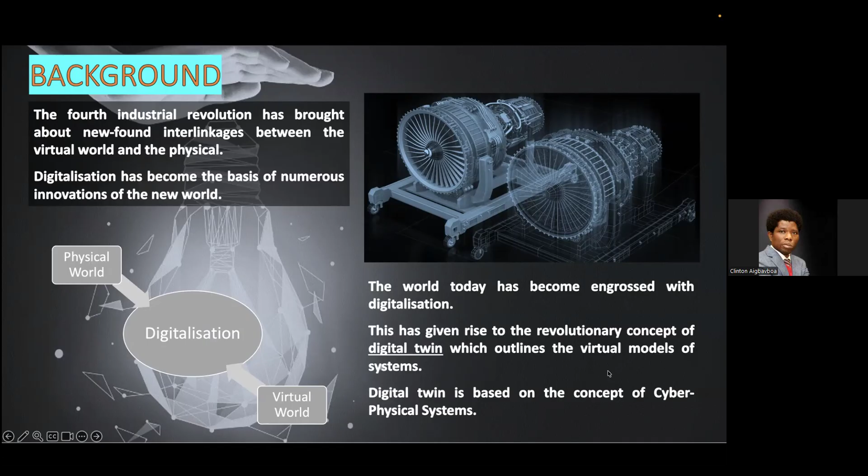I think one of the things we must pay attention to when it comes to the fourth industrial revolution is that it's really helping the global south to leapfrog and manage its built environment. Digitalization underpins a whole lot of global innovations, helping us drive new methods of design, operation, and problem solving across every industry. The concept of digital twin has emerged as a powerful tool, providing a virtual representation of physical systems for enhanced monitoring, analysis, and optimization of the space we're working in.

As we all know, the digital twin is more or less a digital replica or representation of a physical system or asset, enabling us to manage, monitor, and analyze, and also to optimize systems either remotely, or to test scenarios and predict future performance. This is one of the things we thought about when conceptualizing the experiment I'm going to present shortly.

I think the whole concept of digital twin ensures that I see it as a very dynamic digital representation of a physical object. Considering some of the things we're doing at the moment within my research center, we're actually creating digital replicas of bridges, because we've had issues with failed bridges, and we're working with the local municipality here to carry out condition maintenance and real-time predictive assessments of infrastructure. We're looking at water dams, reservoirs, and also bridges across Johannesburg. It's one of the things we're working on for the new year.

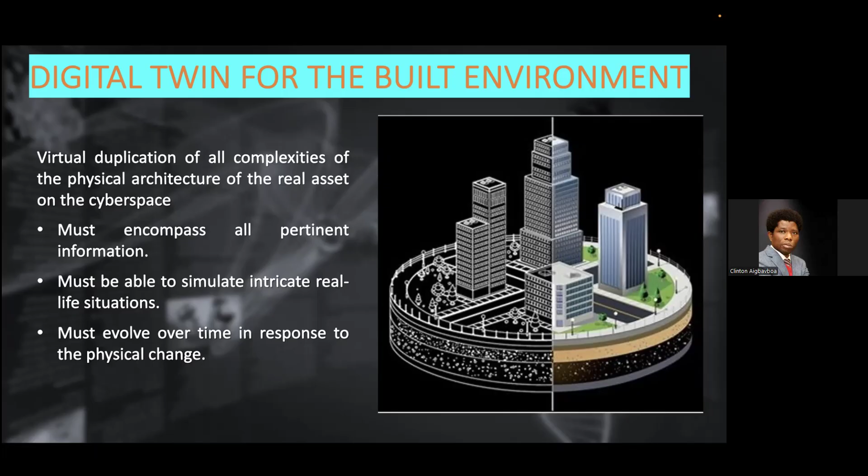Looking at the digital twin for the built environment, I think one of the things we need to look at is that the DT functions by continually drawing data from a particular physical system, through the creation of an accurate virtual counterpart. If that is not there, we will not be able to monitor or harness the data from those systems. So the whole model of DT depends on real-time information about the conditions, the boundaries, the behavior, and specific parameters which must be in place, along with the system dynamics that enable us to create a precise and responsive digital representation of that object.

In terms of our research motivation, one of the things I had in mind was the whole emergence of BIM. The application of digital twin technology within the built environment is still new within the global south, and mostly in South Africa. But from experience and looking at work from other geographical contexts, you realize that apart from providing a virtual duplication of the physical asset, we also have the opportunity of creating accuracy and usefulness to measure how this infrastructure actually performs. So one of the things we had in mind was to model the intelligence of a particular space to see how it performs and how it's actually functioning.

In terms of the digital twin for IEQ, that's indoor environmental quality, this for me represents a very valuable approach, bringing DT into it to optimize and enhance the health, comfort, and well-being of occupants in the built space, because we spend more time indoors compared to outdoors. IEQ encompasses various factors like indoor air quality, temperature, humidity, lighting, and acoustic properties. We believe that by creating a dynamic digital replica of the space, DT will help us simulate, analyze, and monitor the performance of various systems such as heating, ventilation, HVAC, and the acoustic properties of that particular space.

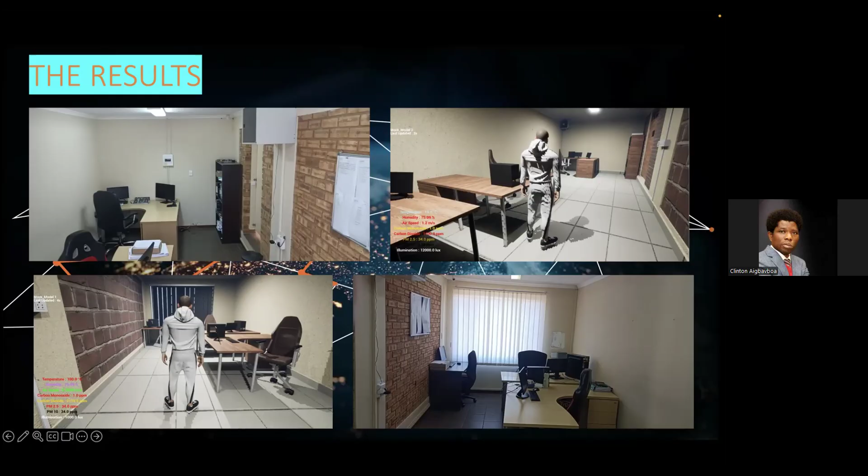Real-time environmental data were captured, including temperature, humidity, air speed, carbon monoxide levels, and particulate matter. All of this was integrated directly into the virtual environment, enabling dynamic monitoring of indoor environmental quality.

It looks something like this. I want to show a short video of the space to demonstrate how the system performed in real time.

This was basically the space, and we had a virtual object. In real time, if you look at the left-hand side, within a particular day, you could actually see the temperature rise within the space, the humidity, the airspeed, the carbon monoxide level, carbon dioxide, PM2.5, PM10, and even the illumination in terms of what is happening within the space.

Even when the windows are open, we try to get some actuators in terms of controlling the windows. That was a little bit complex for us, so we kind of relied on the occupants of the space in terms of when they open and close the windows. That was one of the things we did in the experiment.

In terms of the result, one of the things I want to bring out is that when we analyze the real-time and historical data collected, the digital twin identifies correlations and predicts the optimum moment for adjustment in building conditions. For instance, how do we regulate the artificial lighting, adjust the blinds, open or close the windows, and modify the air conditioning in the space. The system integrated big data analytics with benchmarking standards to inform optimized management practices, creating a smart management plan that continuously responds to the user's needs and environmental changes.

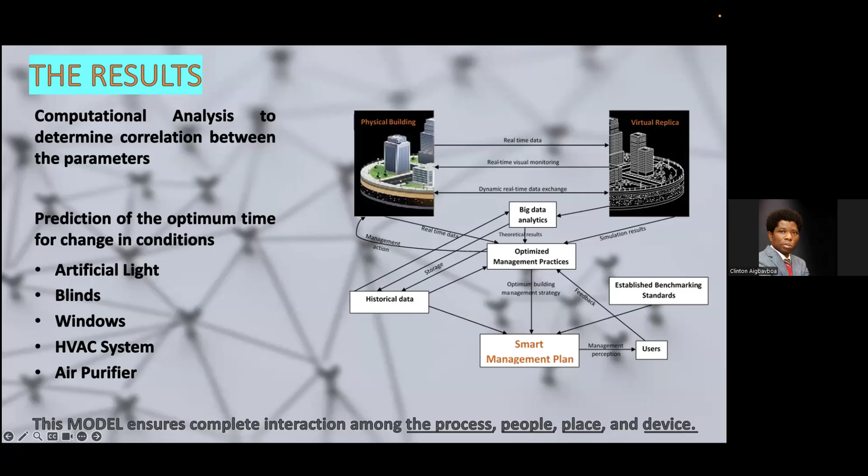One of the things we observed is that at a certain time of day, some occupants feel very uncomfortable when the carbon monoxide level is a little high within the space. We collected data over time, and at the end of the day, the model ensures a complete interaction among the process, the people, the place, and the device that was used.

In terms of the futuristic application of our results, we believe that beyond this particular space, it can also be used to simulate large lecture halls, which we are trying to do at the moment in the new academic year. We're looking at some lecture halls, and we're also trying to create a smart campus to develop our campus air quality index. We already have the equipment we're looking at.

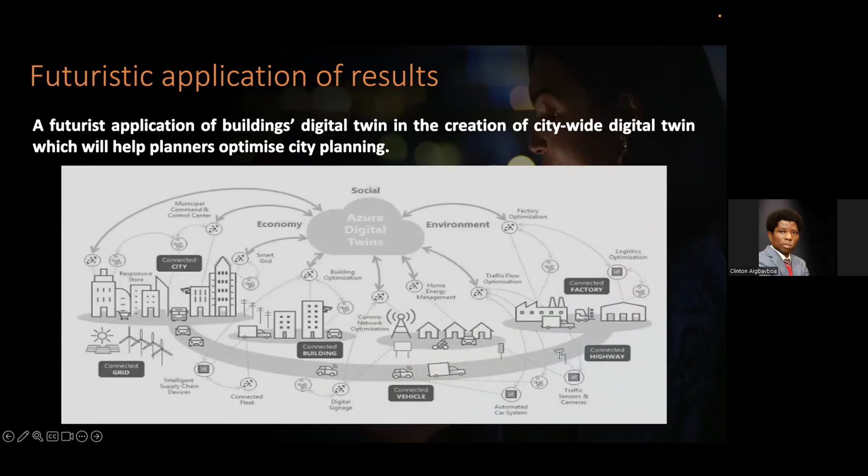It's also useful to create a city-wide digital twin, which can help planners optimize city planning. I read something about Estonia the other day — they're big in digital twin technology, actually creating a digital twin of the entire country. That's something we can also look at: is it possible to create an entire digital twin of a campus?

In conclusion, the digital revolution is really transforming every aspect of our lives, and we believe it's going to come with a whole lot of importance, actually helping us understand how our spaces behave better.

As I said, this is an ongoing project, and we're trying to scale it. In terms of global implications, the study relates to SDG 11 and SDG 3, which was a critical focal point for the study — good health and well-being — and also looking at the aspect of sustainable cities and communities.

One of the things we are doing at the moment is trying to create a digital lab to scale what we have started already. We've taken delivery of some equipment to carry out better modeling for our space by creating a digital twin for our campus and also for the major lecture halls within the university. I think I'll stop here. Thank you very much.

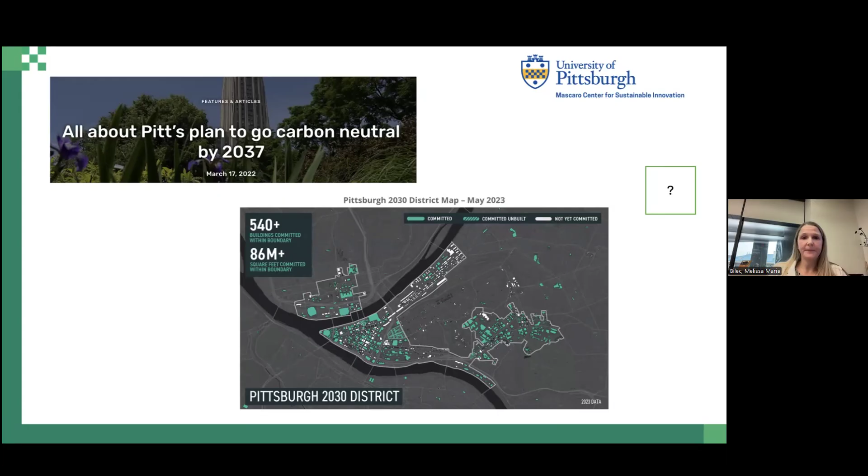So how are we going to get there, knowing that buildings are at 42% nationally? We need a plan related to buildings, because if not, we're not going to get there. That's really what a big part of my research is.

I really want to echo what Prof. Clinton and Prof. John said. One of the things is there's so much disparate information, different standards, inconsistencies, and it's really hard when you're essentially doing this really big data science exercise of bringing all these data streams together. That's really what we've been trying to explore.

I also worked at our local urban redevelopment authority in Pittsburgh for 7 years, and I always am thinking, how can we help the city? What can we do?

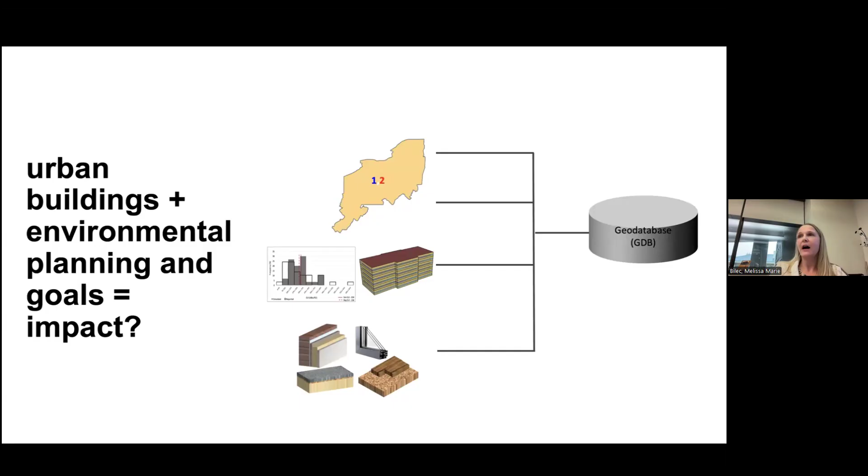Years ago, with one of the PhD students I worked with, Rezvan, I said I would love to put together all these different layers of how the material is flowing, how the energy is flowing, how that relates to carbon, and inform the different regional decision makers on how to make these decisions collectively. So we started to do that, putting together these really different layers of a map, and I'll walk through how that has evolved over time.

But again, I really want to go back to: a goal without a plan is just a wish. So to say that we're going to meet these goals, we need a plan. As an engineer, I'm like, we need a plan.

So these are two ongoing projects that we've had. The first one I'll talk about a little bit more briefly, but it's really informed the work we're doing with digital twins today. This was the work done by Rezvan and our research team.

And we answered questions like: what materials are in place in the buildings? When will new material be needed, so when will we demolish buildings? How much energy is used in the buildings, and how will that change related to climate? And how do we need to think about this holistically?

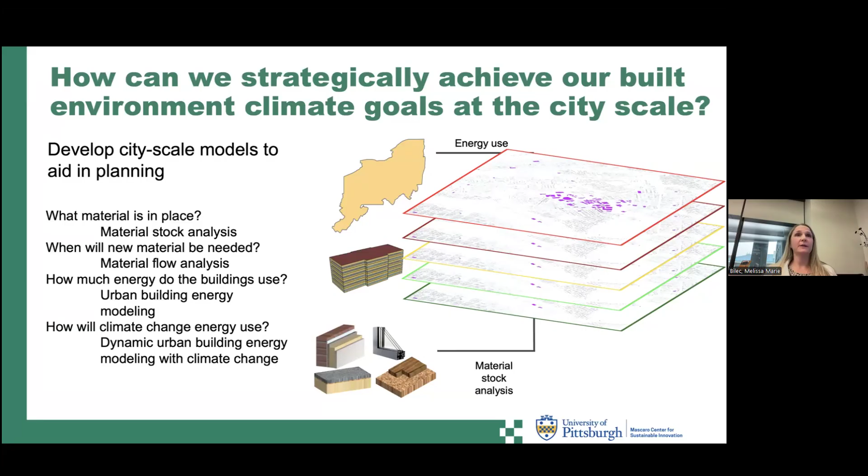This was before the concept of digital twins even came onto my radar screen. This is Federica, who's working on her dissertation today, and this is Rezvan, who's doing large scale energy analysis across the US, utilizing her work from her PhD, which is great, thank goodness.

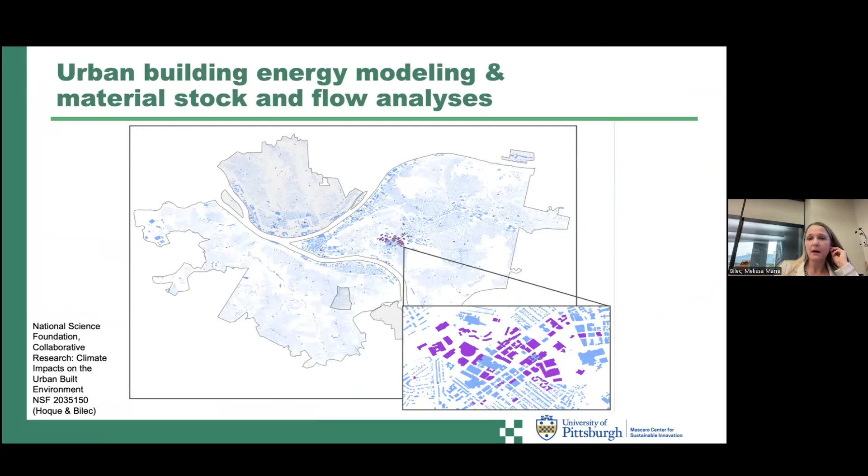So what we did was develop this urban building energy modeling and material stock and flow analysis for the government and educational buildings in the city of Pittsburgh. We went through this really long process. Step 1 was the GIS footprint—and Dr. Clinton, Prof. Clinton, went through something similar. We developed things like the envelope properties, used LiDAR analysis, Energy Plus, all these things to come up with this work.

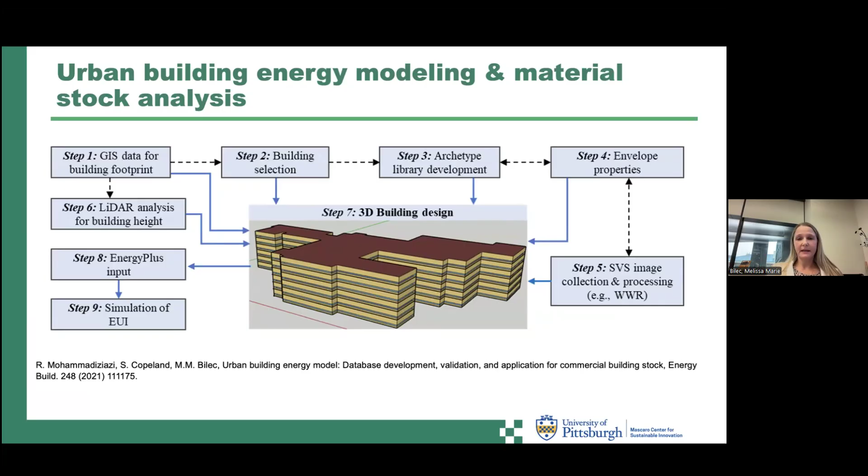And this is an example. At the end, what we were able to do was predict the energy use intensity of the different buildings, and this is an example of one of the figures from our paper. We also looked at the amount of materials in the building, and we're continuing that work now with PhD student Rahaf to further disaggregate and look at that at a more granular scale.

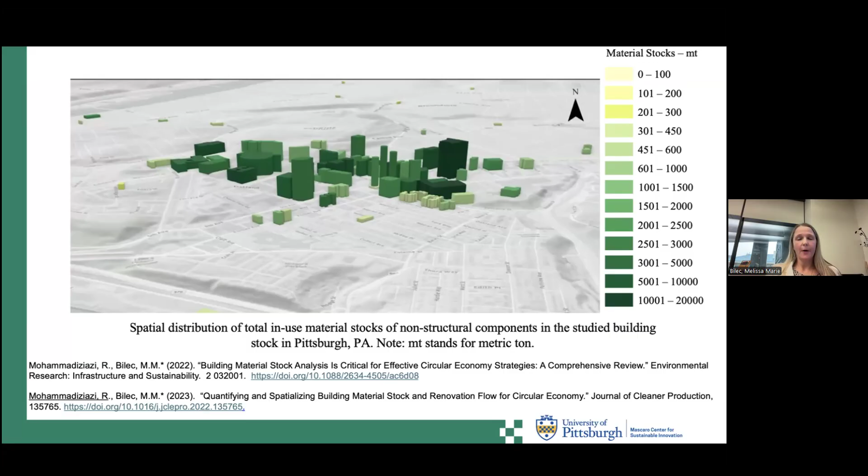But what we realized quickly is this was really hard work, people. This was hard work—Rezvan is a very hard worker, and it is so much hard work. So at the same time, we're like, wait a second, what's this digital twin thing that we know about? Can this help us? This might be much, much better. So we started to combine aspects of the work we were doing with digital twin technologies.

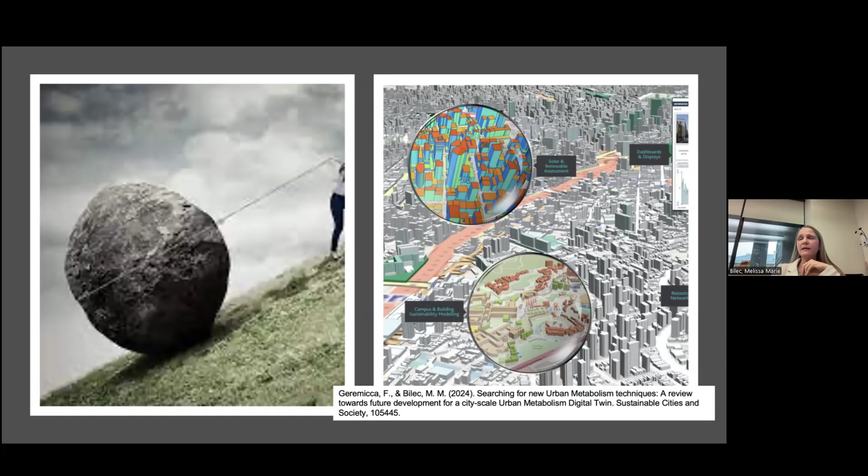The first thing we did was a review paper—more of a review paper—looking for opportunities to use digital twins in what we call urban metabolism. We really started to try to understand: what is a digital twin, and how can we utilize it?

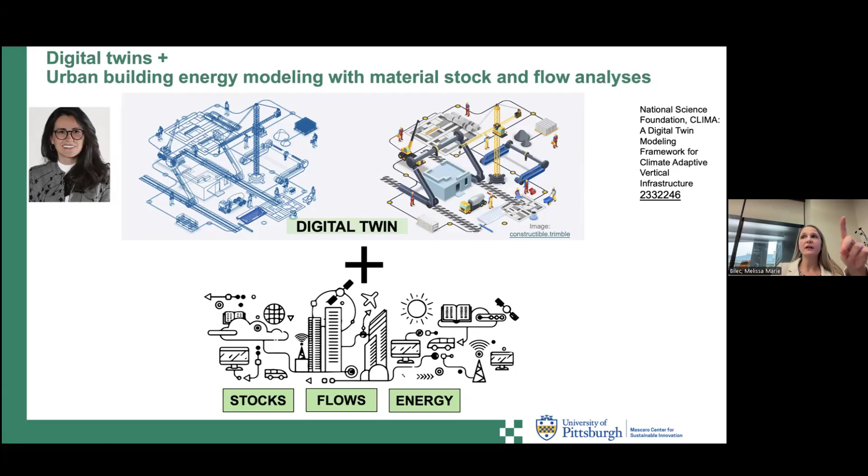And I wanted to echo what Prof. Clinton said—I also agree that indoor environmental quality, especially in the built environment, is a key way to integrate the work we're doing within digital twin technology, within digital twins. Also, I think energy and material flows are two really important elements as well.

So what we worked on was this flow of information. The first thing we did was work through creating the digital twin, and I'm going to focus on these ones today. We've also integrated elements of dynamic modeling, and I have colleagues working on climate adaptive building technology—Dr. John Brigham—and Dr. Alessandro Fascetti is also working on aspects of digital twin technologies.

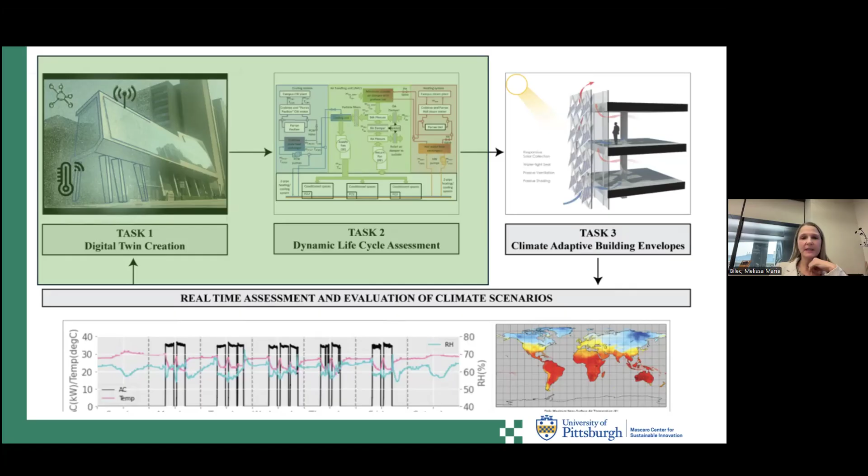So, sorry, this should say under review. So this is our process, and what you'll see here is what we did, which was also done by Dr. Clinton, for an existing building. This is actually the building we're in right now, the Mascaro Center for Sustainable Innovation.

We had all the construction drawings, and we also did an in-depth laser scan of the building to see what data is better and how we can actually utilize it. Then we created a building information model.

After creating the building information model, we did two sustainability assessments. One is the material flow analysis, looking at what material is in the building and when we predict it will either need to be replaced or can be used for other purposes. The other is a life cycle assessment to estimate carbon dioxide emissions.

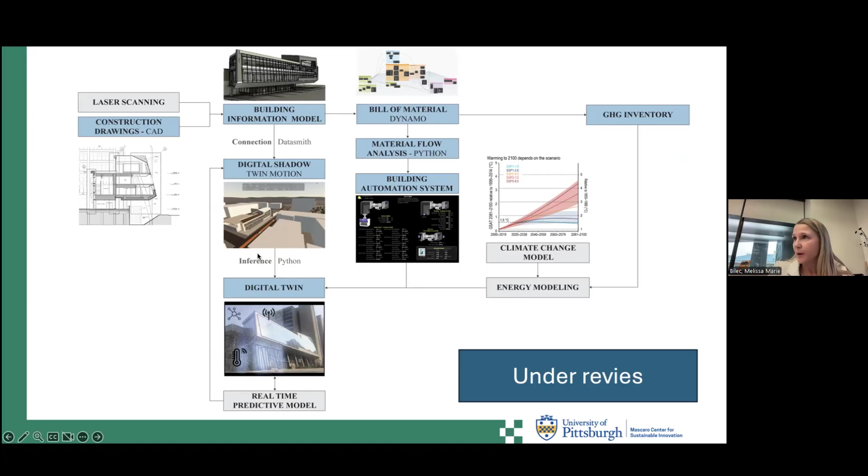We also tried to integrate the building automation system, which in our case lets us look at things like temperature and aspects of air quality. Then we put all of this information into the digital twin, and that's kind of where that's at.

Let me walk through this a bit more. This is the digital modeling we did, step one, and this is where we're at in the research. I'd say we're at the 'how to make the recipes' stage - figuring out how we actually do this work. We're integrating engineering, architecture, data science, and climate modeling in a really unique way. I'm excited about it.

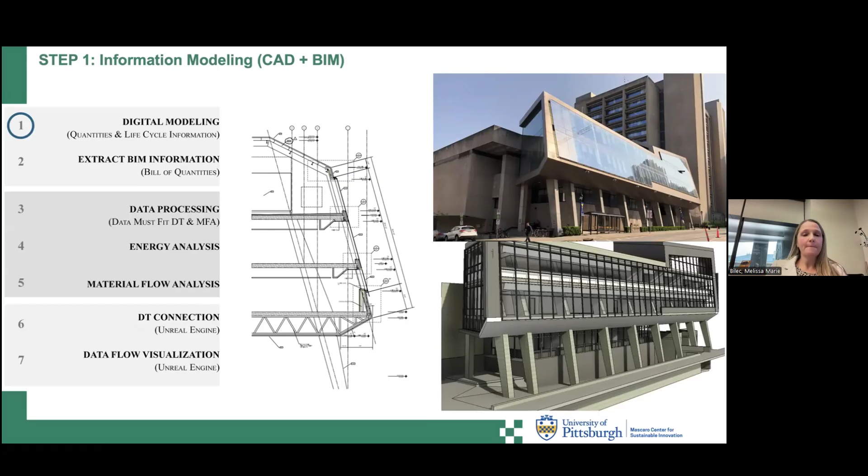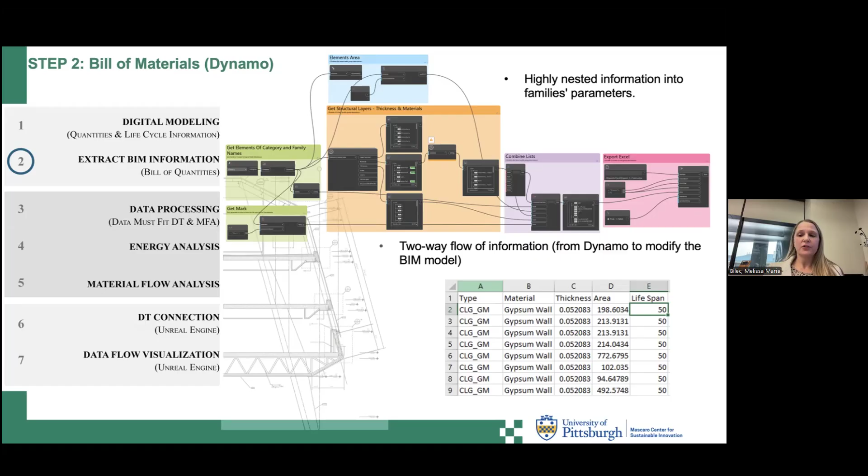So we did the quantity takeoff, and then we utilized Dynamo to go in and extract the bill of materials from the building information model. The Dynamo script we used was developed by a great researcher named Stefan Pollack.

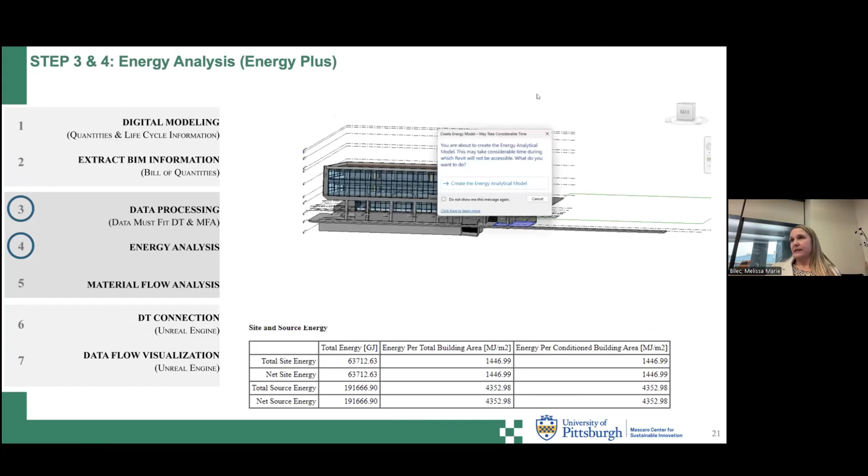Then we thought about how we can take the current information and do the energy analysis as well. Within the tool we use, called Revit, we created different zones to calculate the total amount of energy used on an annual basis for our Mascaro Center.

One key learning was that the level of detail we created for the building information model was actually too detailed for Energy Plus. We were getting so many errors that we had to go down in scale for the energy analysis, but we needed that level of detail for the material flow analysis. It was a really important lesson for us to go through.

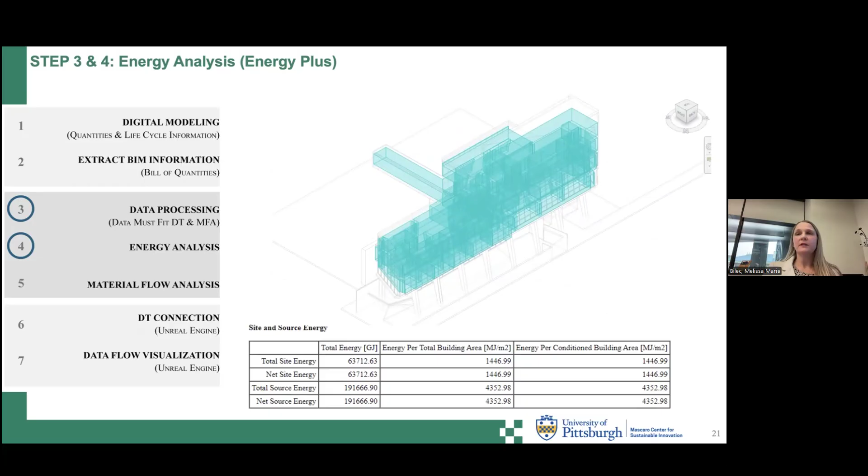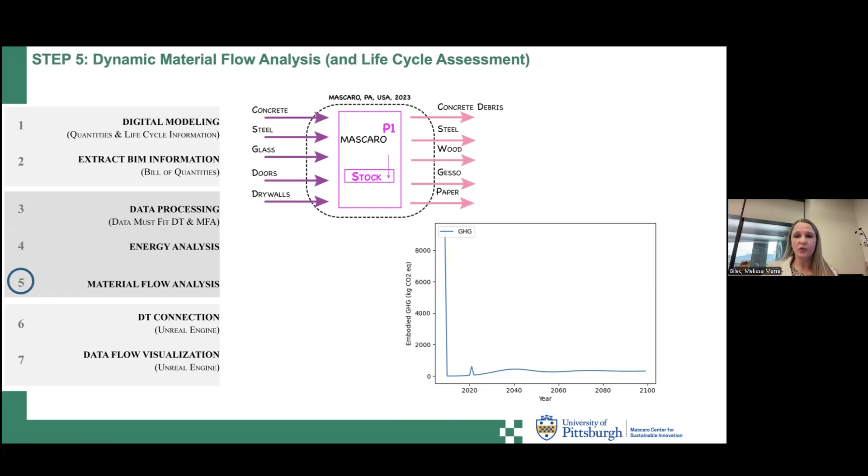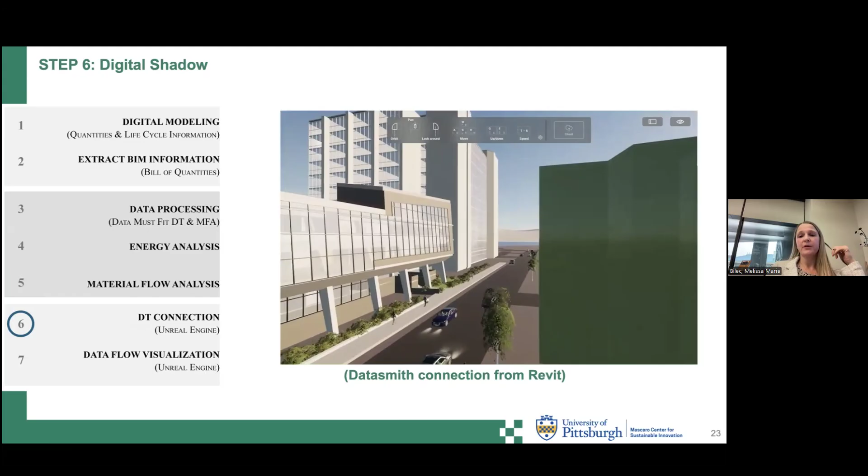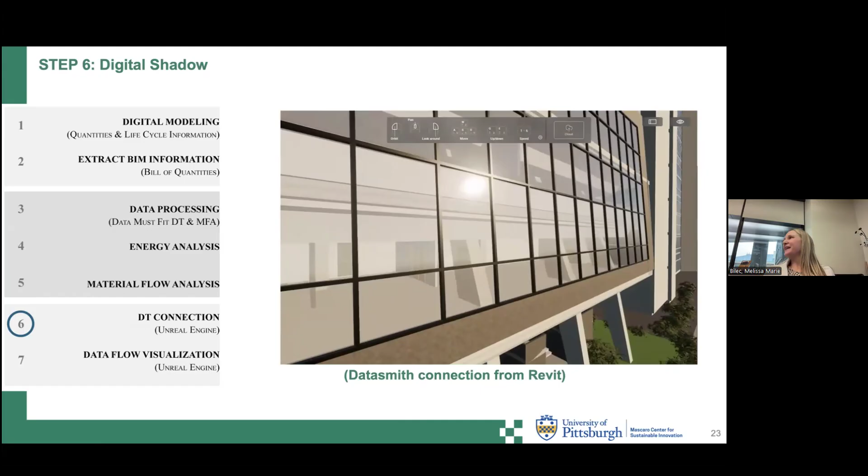The last part we did, and probably what people think of most when they think of a digital twin, used Unreal Engine, which is also what Prof. Clinton used. We took the visualizations created from the building information model and started thinking about what visualizations people want to show or see, so that people like Evan and Aurora can make good decisions in the buildings they're helping us support at the University of Pittsburgh.

And this is a non-trivial matter - it takes a really long time to create all of this information.

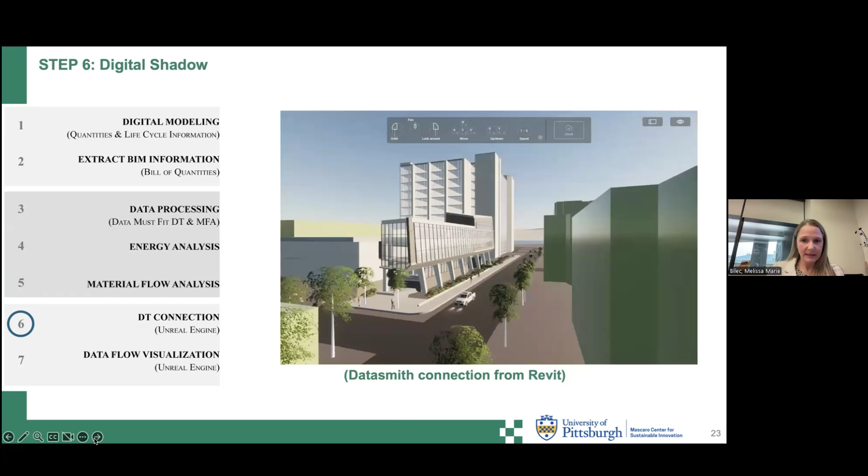One of the key parts we did related specifically to the digital twin technologies was trying to figure out how to integrate the building automation system. When you think about a digital twin, which is different from a digital shadow, you have a two-way street of information, and it was really difficult to do that.

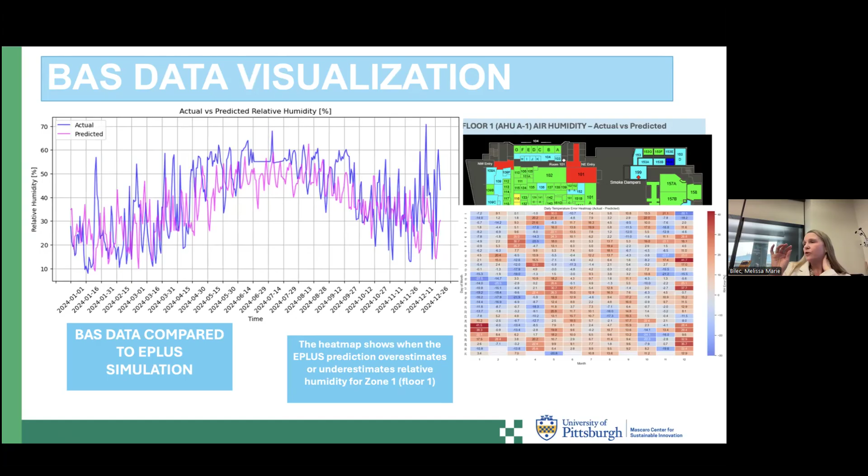And then you're also seeing the heat map, which shows where Energy Plus ultimately overestimates or underestimates systems. So we're starting to get at this kind of two-way system and also looking at predictions, which I think is a really important part of the digital twin model.

And this is also an example of what we would really like to do moving forward. This is on the first floor of the Mascaro Center. What we hope to do is have people be able to click on these different elements and see things like, okay, what time of day is it?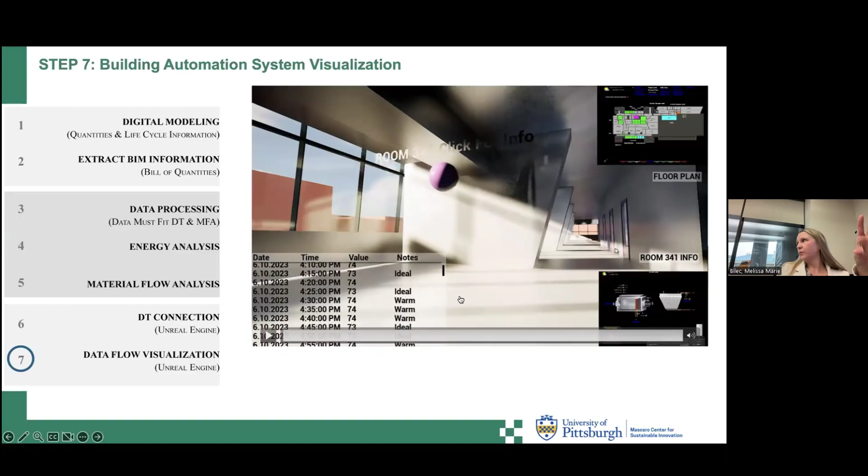This is an example of temperature. And then also to see things like where this is located, all in one total screen. There was a lot of work done just to get to that point.

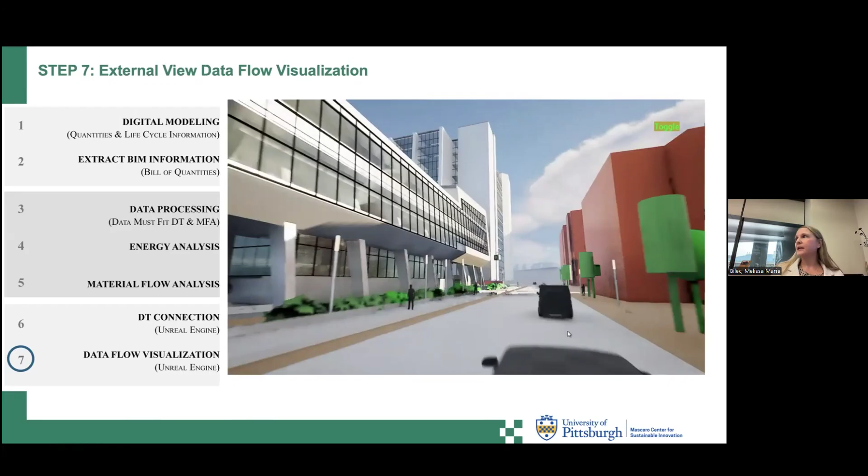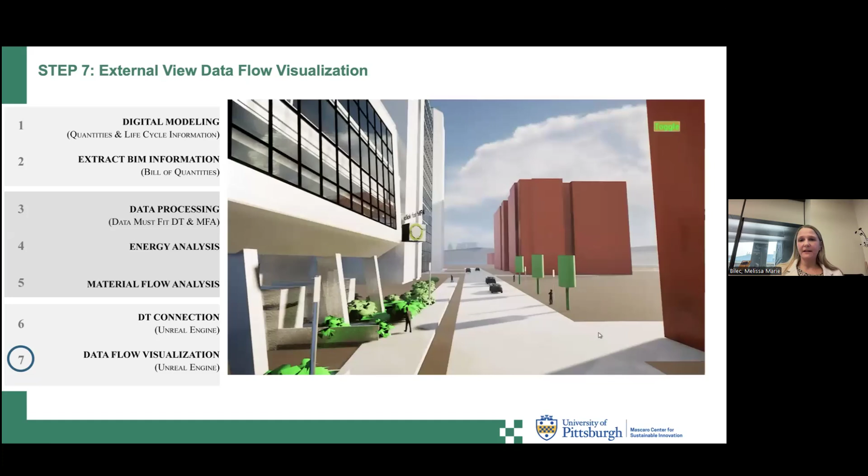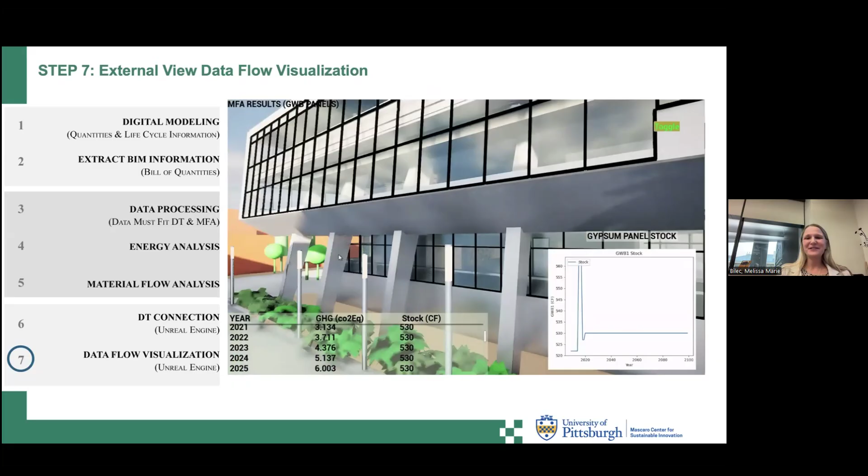You can look at things like how much material is actually in this building, and when is the gypsum going to be gone? Like, when do we need to replace it? And if there are other people also super interested in that, you could imagine gamifying it, which would be so much fun.

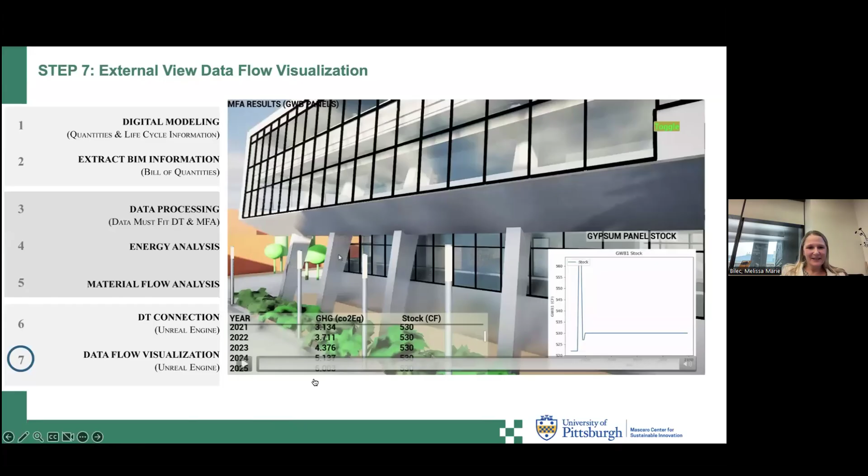So again, part of it is really inspired by bringing everything into one framework and doing this from a sustainability lens. Hold on one second, let me try to advance it. This is just one building, right?

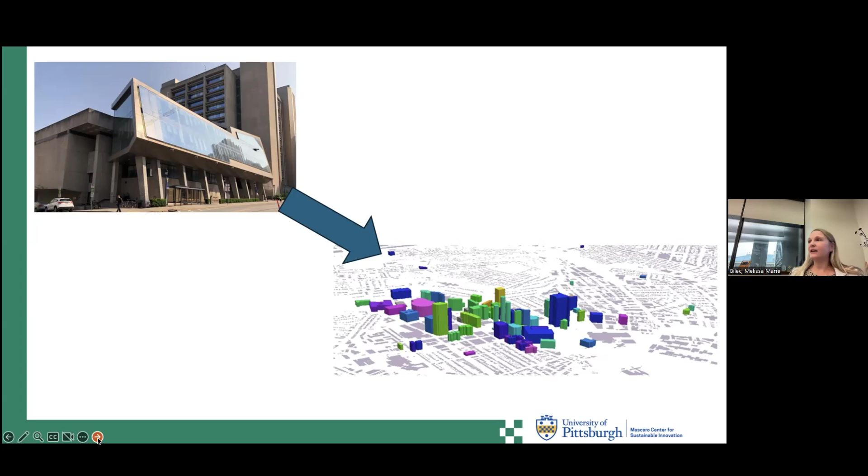How do we scale this up? How can we do this for more buildings? And if you're interested, I'll do a shout out: Federica has taken the one building and now expanded it to 7 additional buildings on O'Hara Street. She'll be talking about that in her dissertation this afternoon.

Thank you, Melissa, that was great. Having served on all of these committees, I can attest that it's been years of data collection, modeling, and a lot of work that goes behind the scenes, which is hard to capture within a 15-minute talk. So thank you so much.